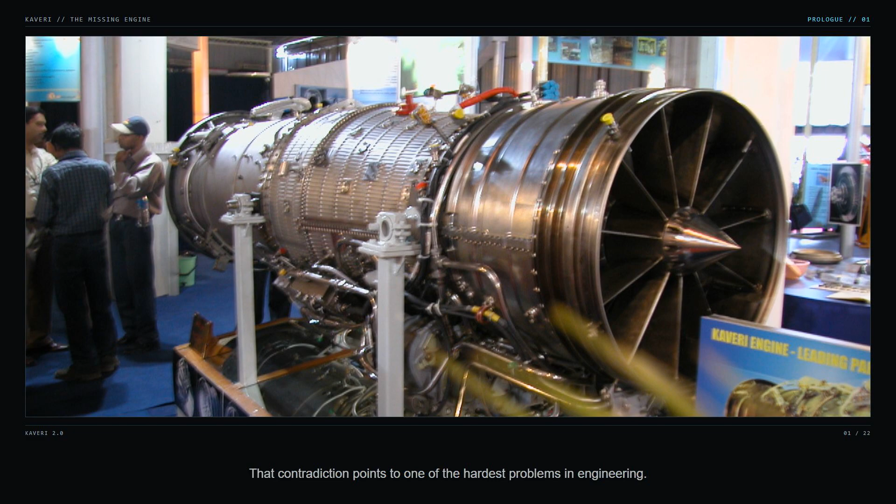India can design a supersonic fighter, build its airframe, write its flight control software, and integrate its weapons. But the Tejas still flies with an imported engine. That contradiction points to one of the hardest problems in engineering. A fighter turbofan must make enormous thrust from a compact machine, remain stable through violent throttle changes, survive temperatures that can weaken its own metal, and do all of this thousands of times.

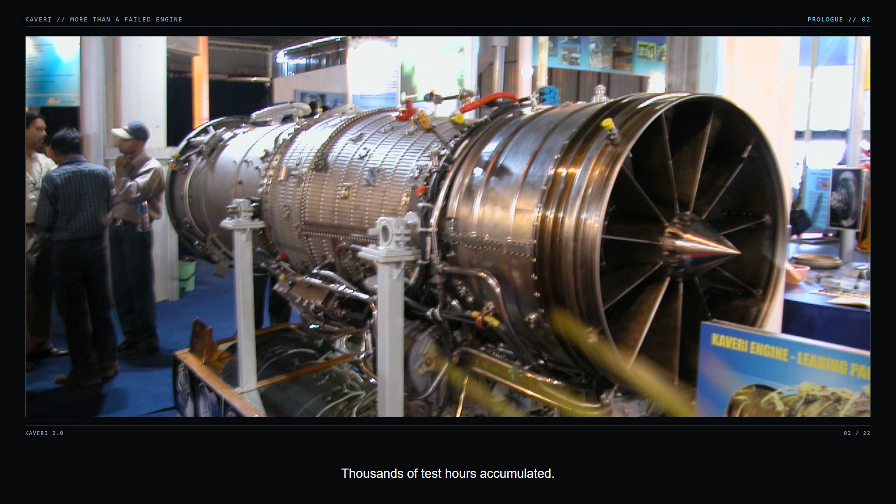Kaveri was India's attempt to master that complete system. The original Kaveri did not become the engine of the Tejas. That fact matters, but calling it simply a failed engine hides the engineering record. Nine full prototypes and four core engines were built. Thousands of test hours accumulated. A Kaveri flew on an IL-76 test bed. Materials, controls, rigs, certification methods, and manufacturing knowledge were created around it.

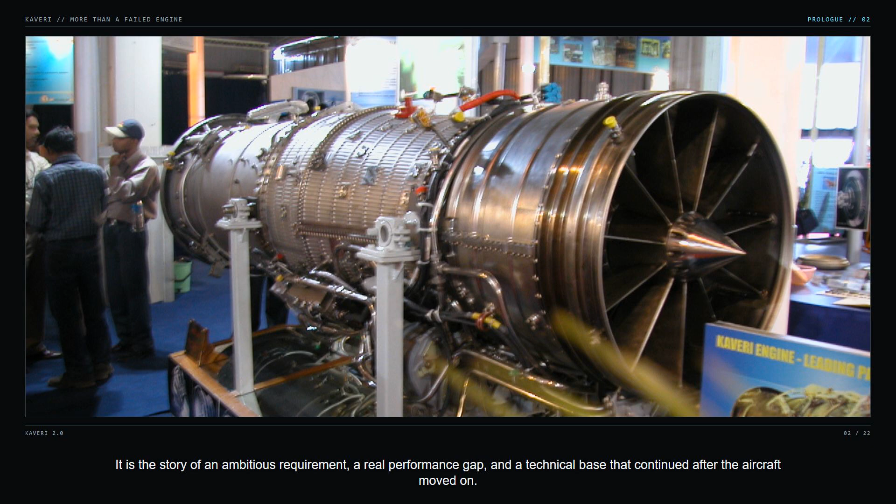The honest story is neither triumph nor humiliation. It is the story of an ambitious requirement, a real performance gap, and a technical base that continued after the aircraft moved on. The Kaveri project was sanctioned in 1989, when the light combat aircraft was still taking shape.

The goal was not merely to assemble a foreign design. GTRE was expected to develop an indigenous afterburning turbofan within the mass and dimensions available inside a light fighter. That meant solving aerodynamics, combustion, high-temperature materials, bearings, lubrication, controls, testing, and production at the same time. Every module affected the others. A heavier turbine demanded more structure. A weaker compressor reduced pressure and thrust. A hotter cycle demanded better blades and better cooling.

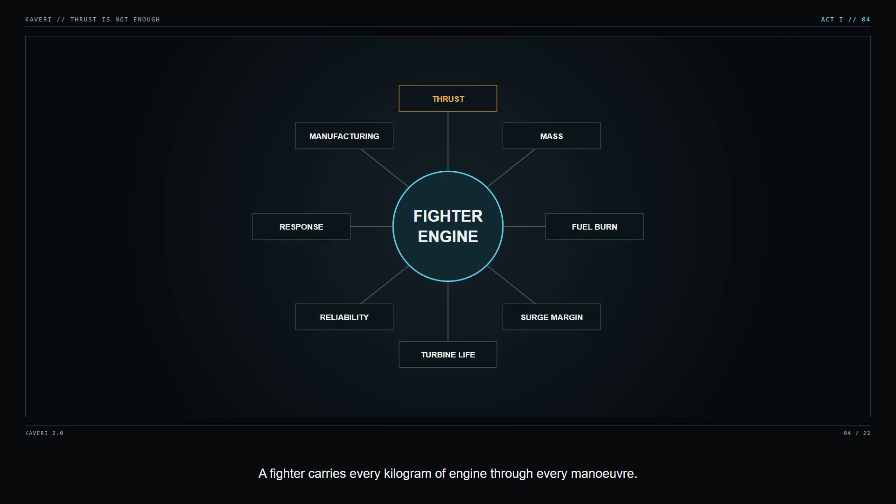An engine cannot be judged by thrust alone. A fighter carries every kilogram of engine through every maneuver. The inlet supplies a limited mass flow. The fuselage fixes the diameter. Fuel consumption controls range. The center of gravity constrains installation. Reliability governs whether the aircraft can be dispatched at all.

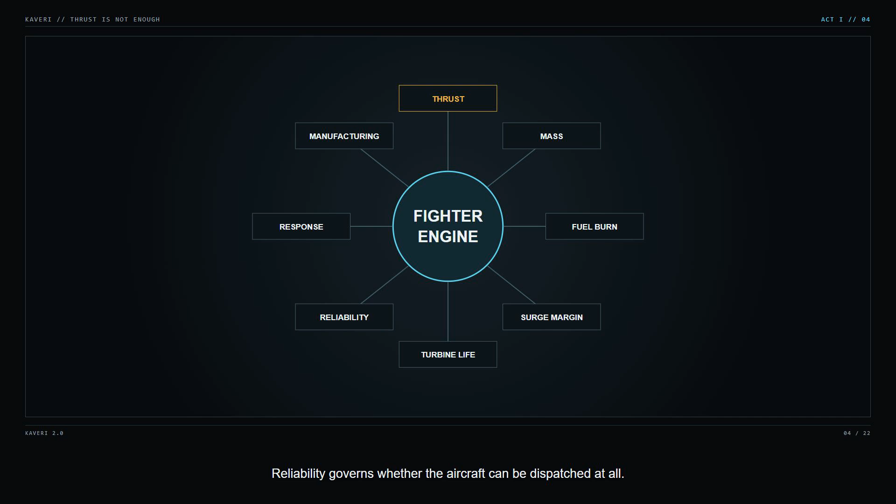The real target is a network: thrust, weight, fuel burn, response, temperature margin, life, and manufacturability. Kaveri had to meet those demands together. Making thrust, once on a stand, was only the beginning.

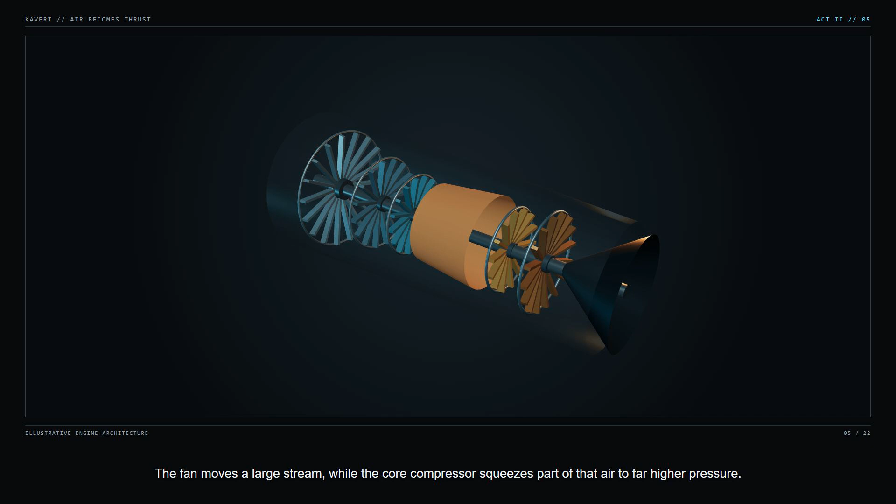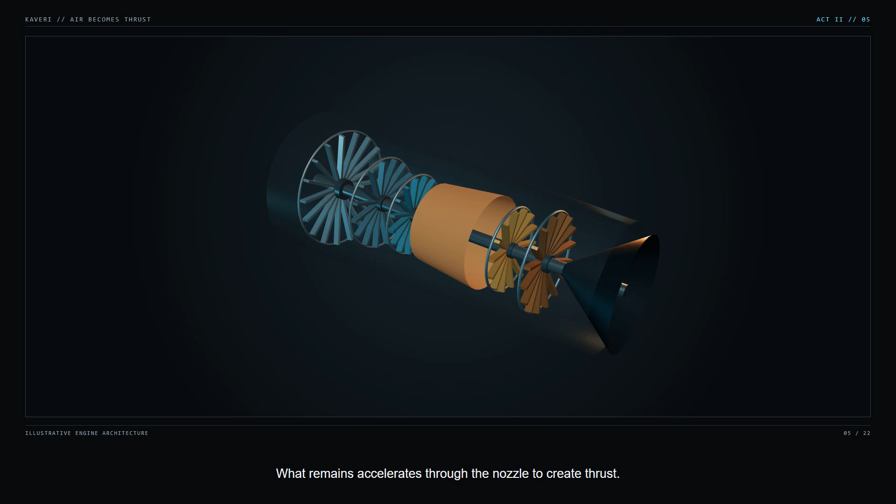A turbofan is a continuous energy conversion machine. Air enters the intake. The fan moves a large stream, while the core compressor squeezes part of that air to far higher pressure. Fuel burns in the combustor. The hot gas expands through turbine stages, which extract enough power to drive the compressor and fan through concentric shafts. What remains accelerates through the nozzle to create thrust. In an afterburning fighter engine, more fuel can be burned downstream of the turbine for a temporary increase in exhaust energy.

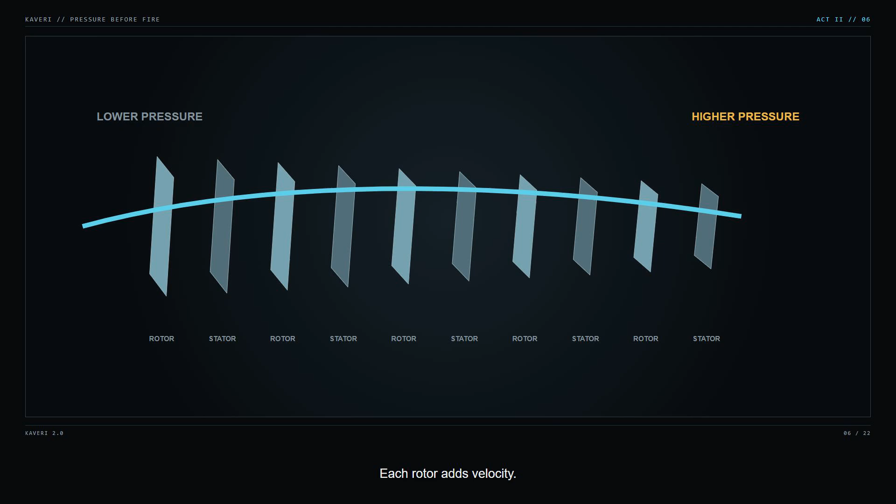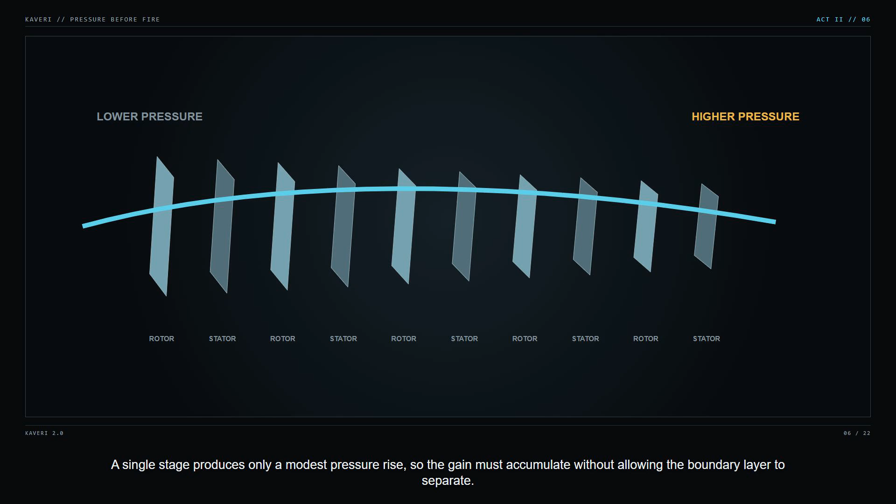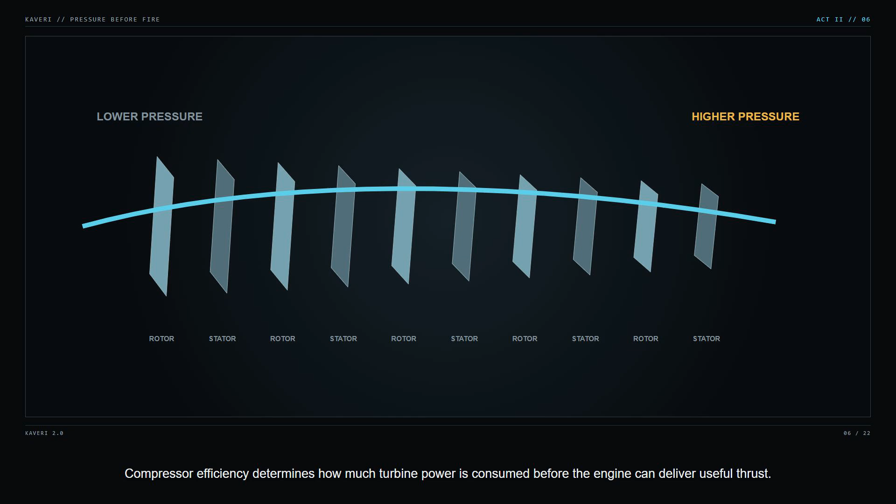The compressor is a ladder of rotating and stationary airfoils. Each rotor adds velocity. Each stator turns part of that velocity into pressure and redirects the flow for the next stage. A single stage produces only a modest pressure rise, so the gain must accumulate without allowing the boundary layer to separate. Clearances measured around blade tips, surface finish, vibration, and manufacturing variation all change the result. Compressor efficiency determines how much turbine power is consumed before the engine can deliver useful thrust.

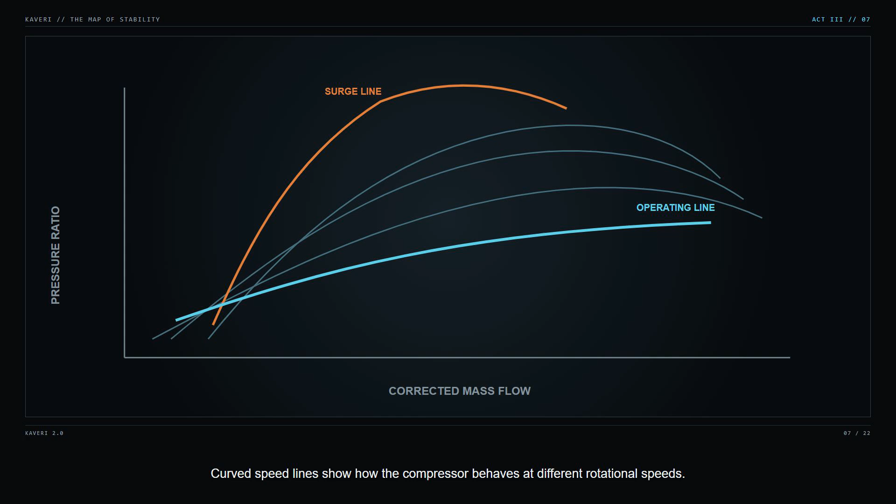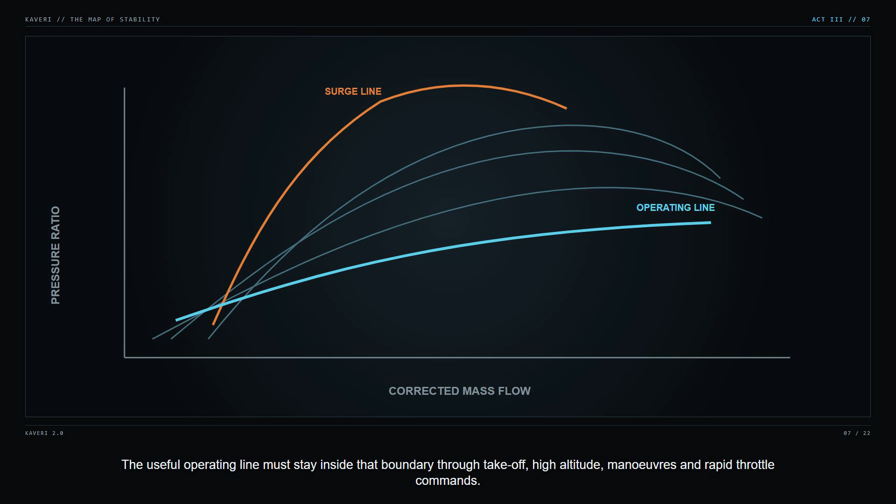Engineers plot compressor behavior on a map. Corrected mass flow runs across one axis. Pressure ratio rises on the other. Curved speed lines show how the compressor behaves at different rotational speeds. Near one edge is choke, where more flow becomes difficult. Near the other is the surge line, where stable compression can collapse. The useful operating line must stay inside that boundary through takeoff, high altitude, maneuvers, and rapid throttle commands. A fighter needs margin not only at steady conditions, but while the entire engine is changing speed.

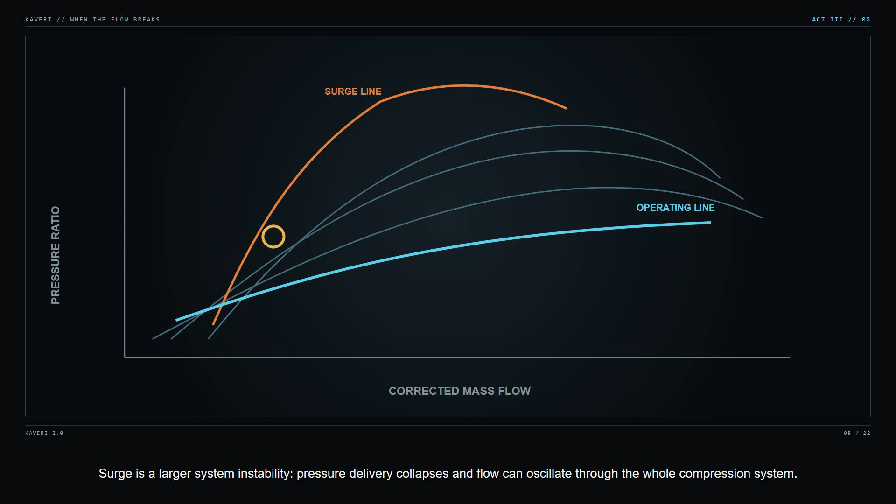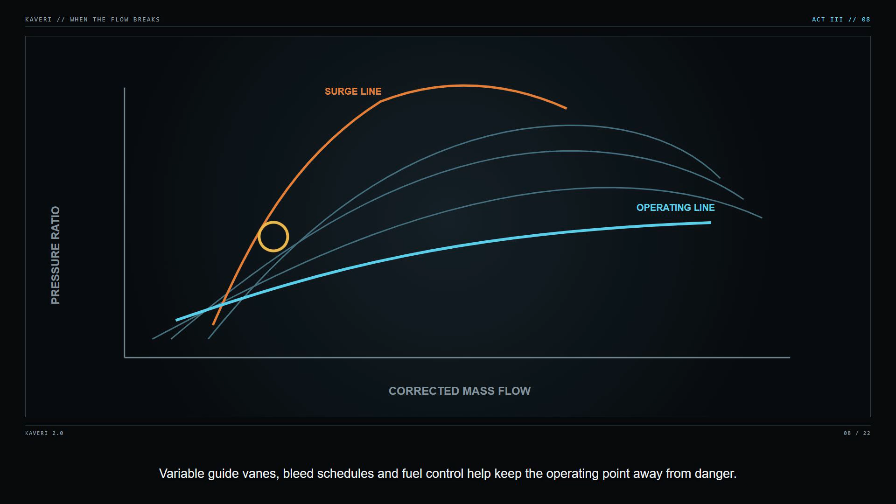Rotating stall begins when regions of separated flow travel around the compressor annulus. Surge is a larger system instability. Pressure delivery collapses and flow can oscillate through the whole compression system. The result may be a bang, loss of thrust, extreme vibration, or flame disturbance. Variable guide vanes, bleed schedules, and fuel control help keep the operating point away from danger. But each protection costs complexity or performance. The compressor must be efficient near its design point, and still tolerant everywhere the aircraft may demand power.

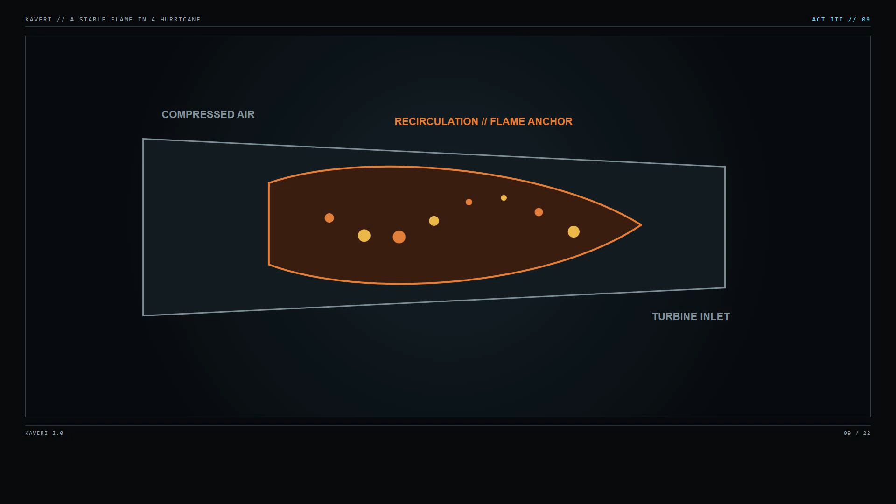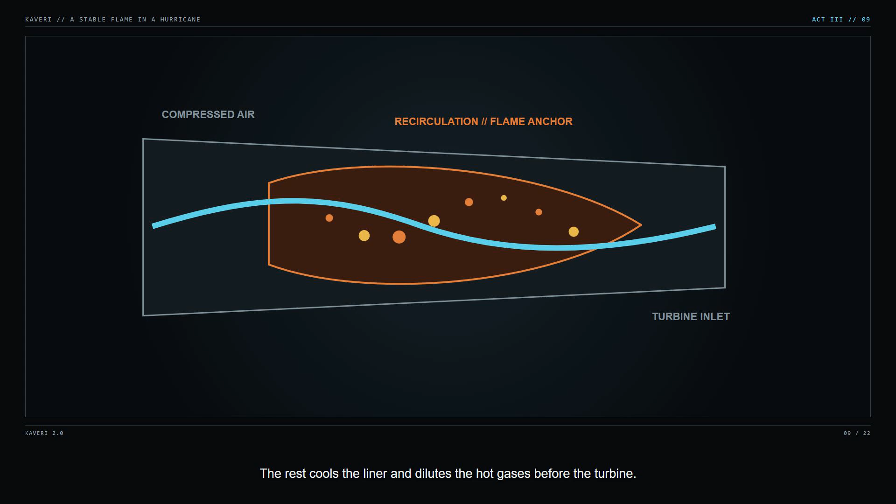Compressed air reaches the combustor moving far too quickly for a flame to survive without careful management. Swirlers create recirculation zones that anchor combustion. Only part of the air enters the primary burning region. The rest cools the liner and dilutes the hot gases before the turbine. Engineers must avoid flameout, pressure oscillation, smoke, and uneven temperature. That last quantity, called pattern factor, is crucial. A local hot streak entering the turbine can shorten blade life, even when the average temperature looks acceptable.

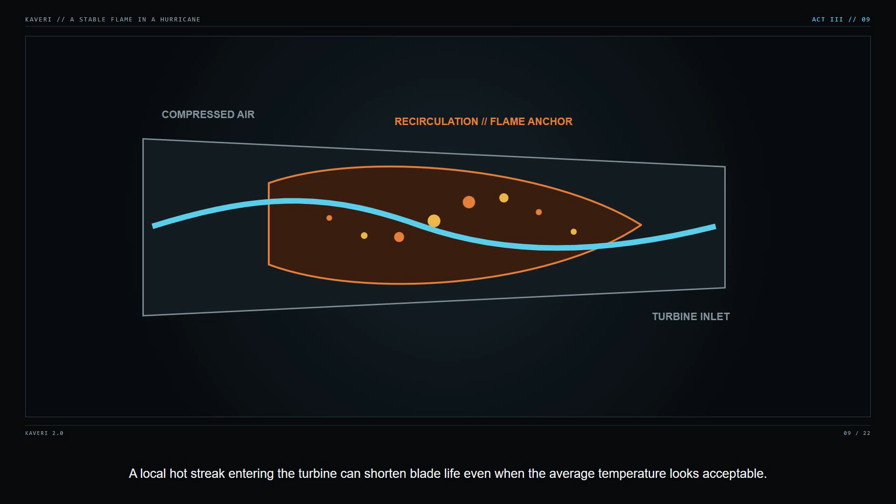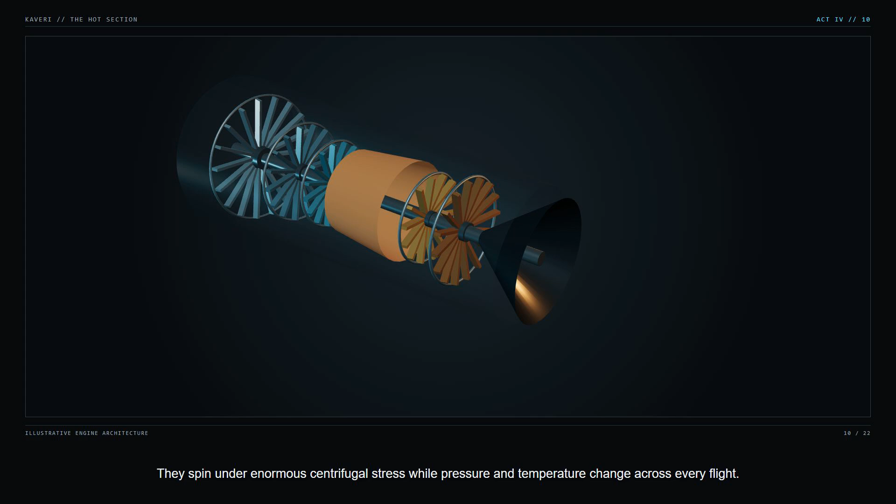The core of the difficulty sits behind the combustor. Turbine blades must extract work from gas hot enough to damage the material carrying the load. They spin under enormous centrifugal stress, while pressure and temperature change across every flight. The Kabini core brought together Kaveri's high-pressure compressor, combustor, and high-pressure turbine, so that this hot-end system could be studied as one machine. Performance here is not a single material number. It is an interaction between alloy, crystal structure, coating, cooling geometry, stress, and manufacturing quality.

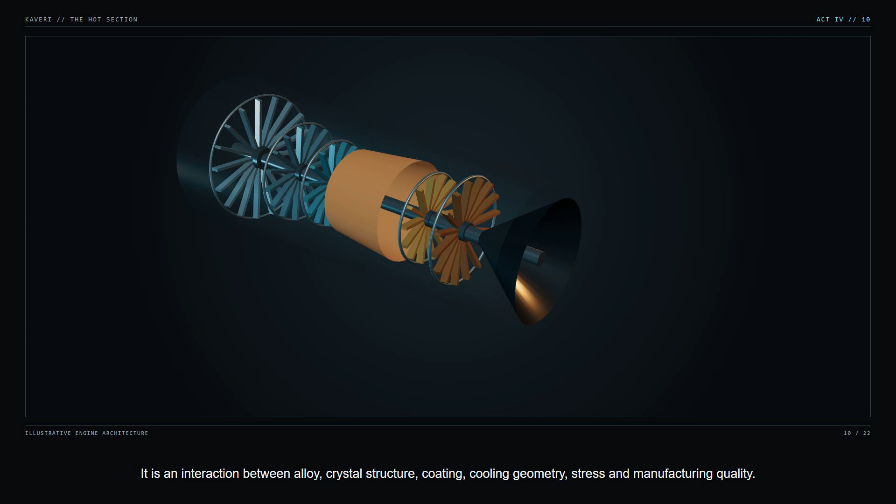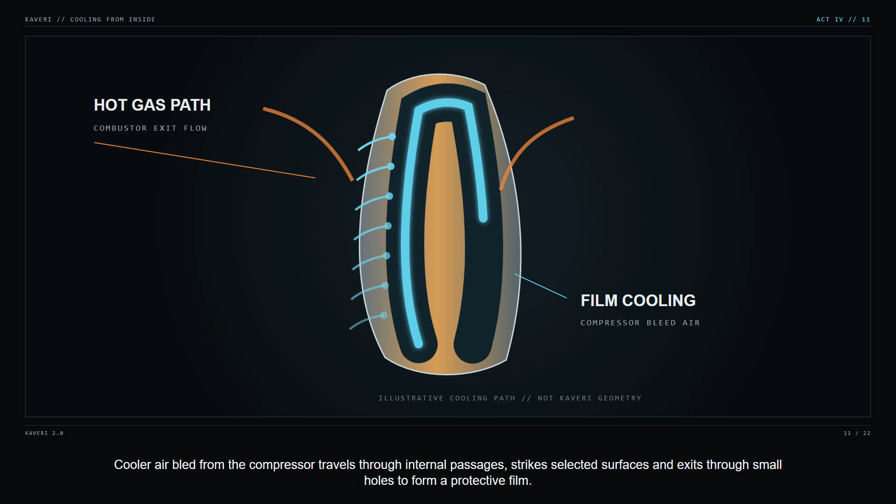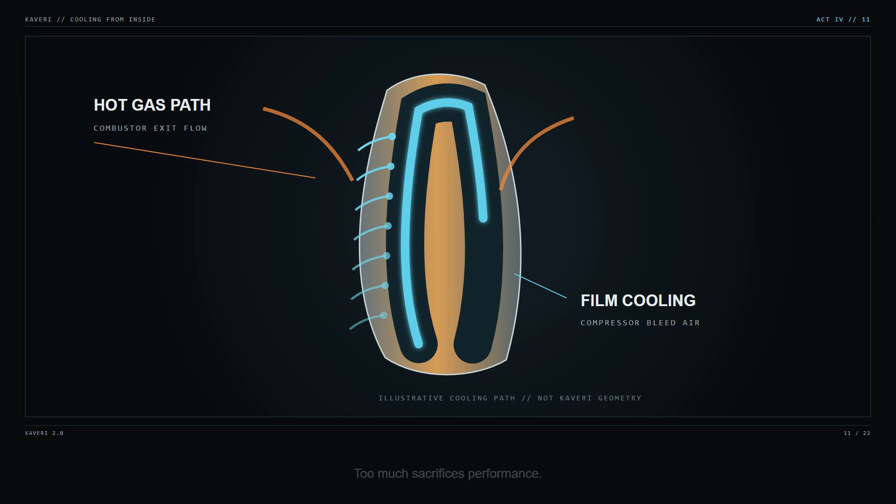A modern turbine blade is often hollow. Cooler air bled from the compressor travels through internal passages, strikes selected surfaces, and exits through small holes to form a protective film. Thermal barrier coatings slow heat entering the metal, but cooling air is not free. Air diverted from the main cycle reduces efficiency, and every hole changes stress and manufacturing difficulty. Too little cooling sacrifices life. Too much sacrifices performance. The design problem is to place limited cooling flow exactly where the blade needs it, repeatedly, across thousands of manufactured parts.

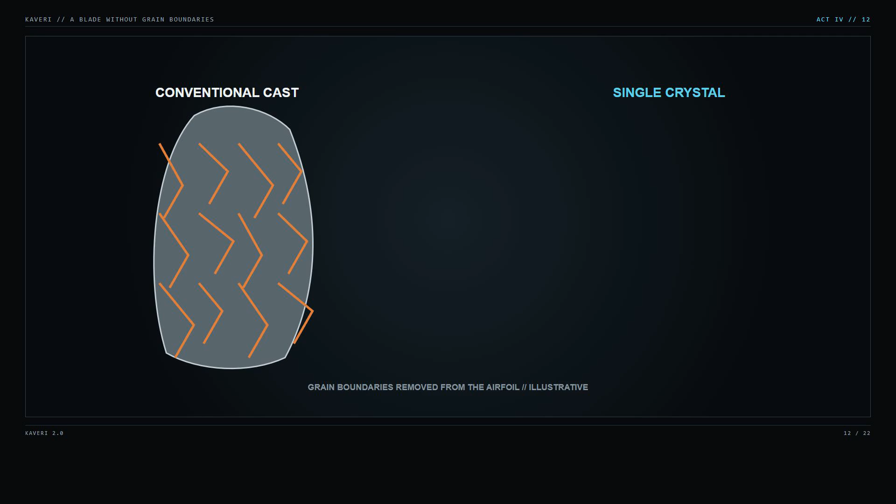Ordinary cast metal contains many crystals separated by grain boundaries.

At high temperature and stress, grain boundaries can become paths for creep and damage. Directionally solidified blades align grains with the major load. Single crystal blades go further by eliminating grain boundaries from the airfoil, but the phrase single crystal can sound more magical than it is.

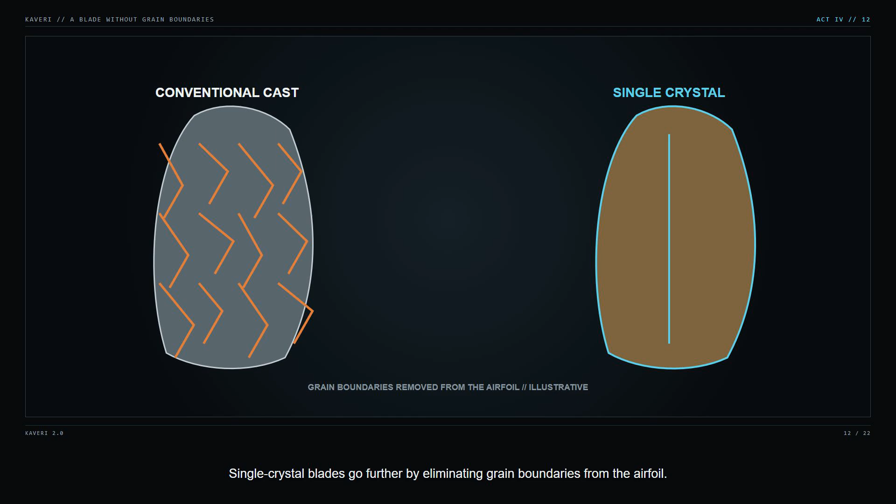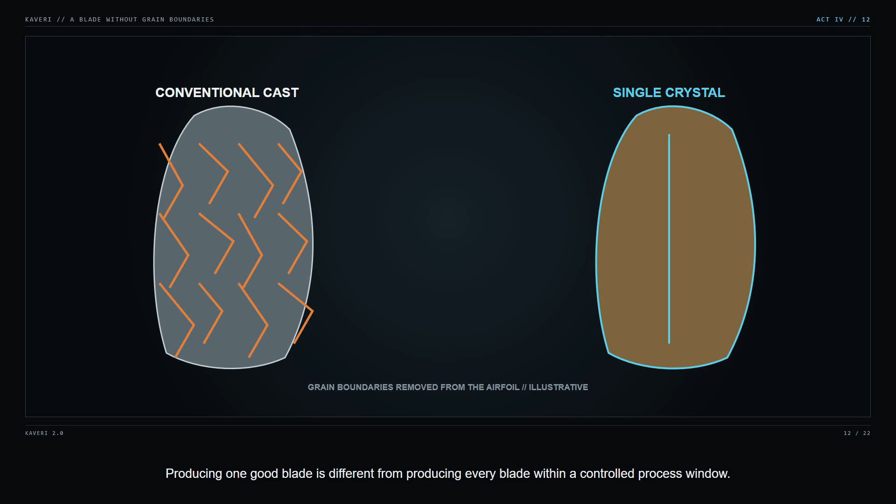The alloy chemistry, casting process, defects, heat treatment, coating, cooling passages, and inspection must all work together. Producing one good blade is different from producing every blade within a controlled process window.

The Tejas decision came down to integration reality. In the configuration examined by the Controller and Auditor General, Kaveri weighed about 135 kilograms more than the cited target and produced 70 kilonewtons against an 81 kilonewton requirement.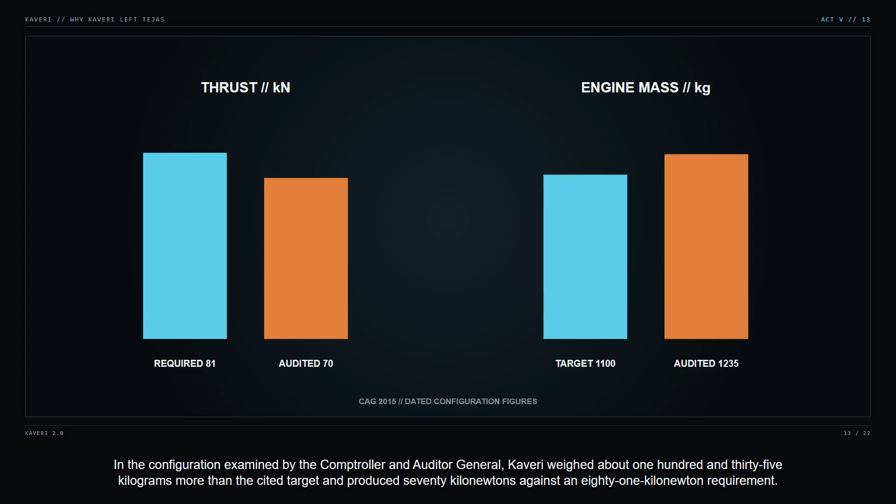Those are dated audit figures, not a claim about every later test article, but they show the coupled problem clearly: less thrust from more mass.

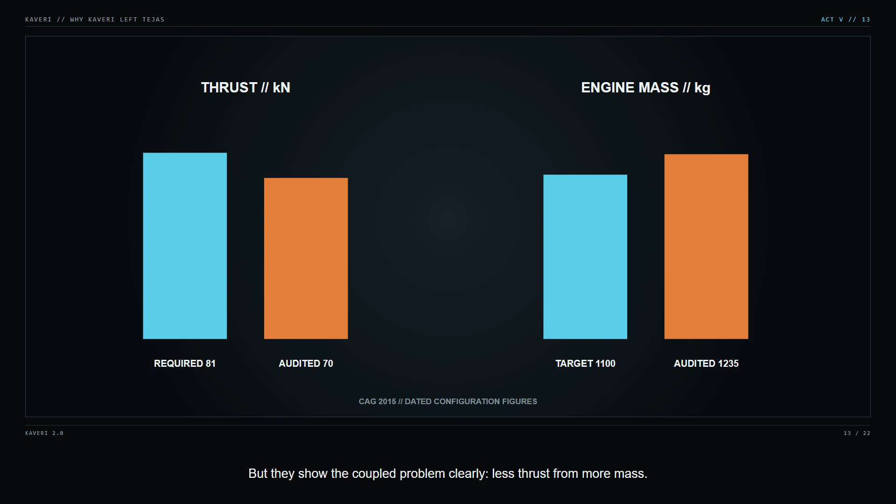The aircraft program could not wait indefinitely for compressor, turbine, control, and reliability work to converge, so Tejas continued with an imported engine. By 2021, official figures listed 3,217 hours of Kaveri engine testing, along with completed altitude and flying testbed trials.

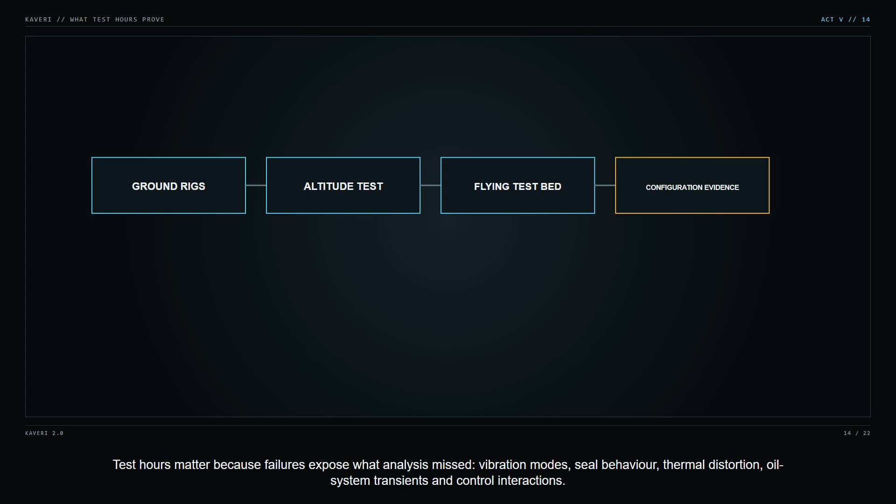Test hours matter because failures expose what analysis missed: vibration modes, seal behavior, thermal distortion, system transients, and control interactions. But a test campaign does not automatically equal an operational engine.

Certification requires a defined configuration, repeatable hardware, demonstrated life, and evidence tied to an aircraft duty cycle. Kaveri built significant test experience while still falling short of the fighter installation it began with.

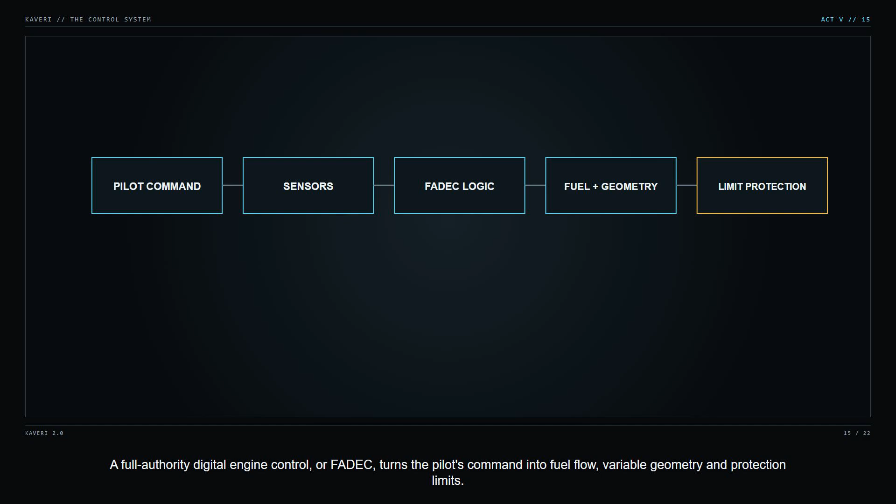Full Authority Digital Engine Control, or FADEC, turns the pilot's command into fuel flow, variable geometry, and protection limits. It watches shaft speed, temperature, pressure, and actuator position. It must accelerate the engine quickly without crossing surge or temperature limits, and it must respond safely when a sensor disagrees.

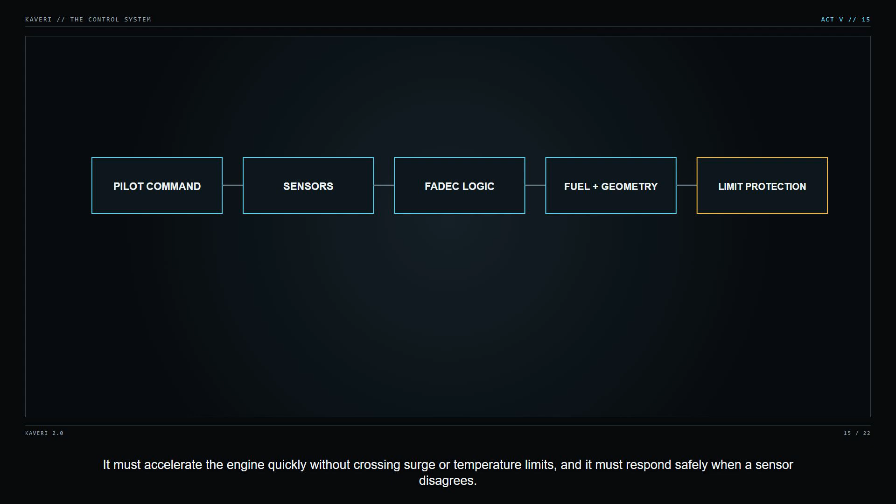India reported designing, developing, and qualifying an indigenous FADEC through the Kaveri program. That is a meaningful capability.

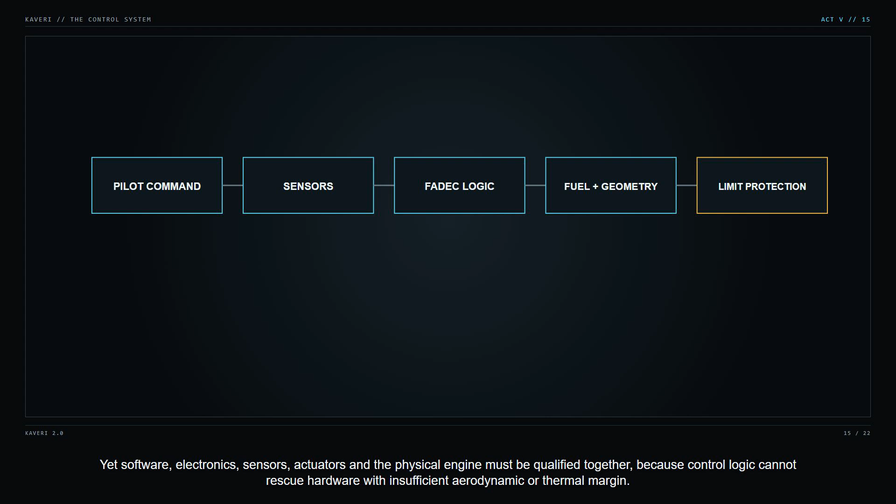Yet software, electronics, sensors, actuators, and the physical engine must be qualified together, because control logic cannot rescue hardware with insufficient aerodynamic or thermal margin.

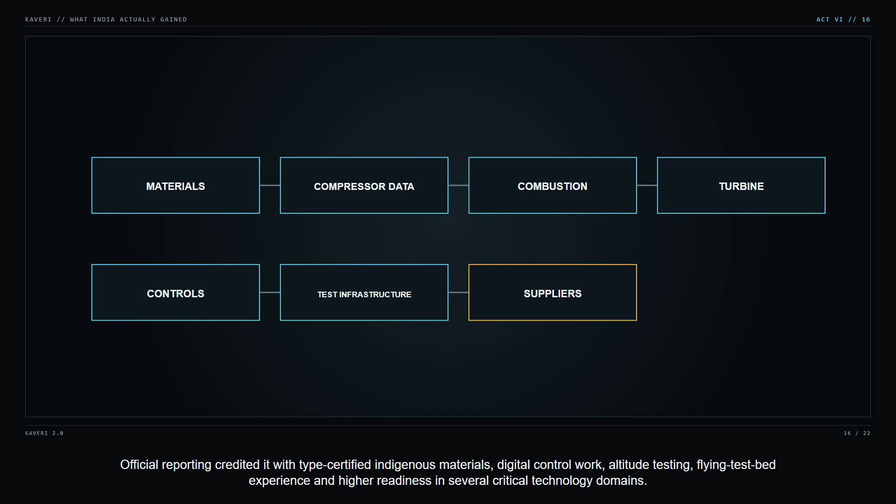The program created more than complete engines. Official reporting credited it with type-certified indigenous materials, digital control work, altitude testing, flying testbed experience, and higher readiness in several critical technology domains.

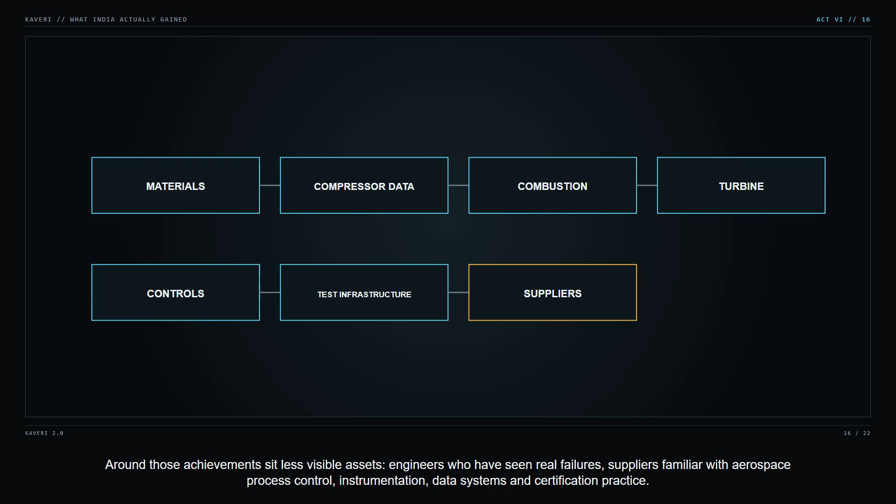Around those achievements sit less visible assets: engineers who have seen real failures, suppliers familiar with aerospace process control, instrumentation, data systems, and certification practice. None of this erases the Tejas shortfall. It explains why the program's value cannot be measured only by whether one engine entered one aircraft.

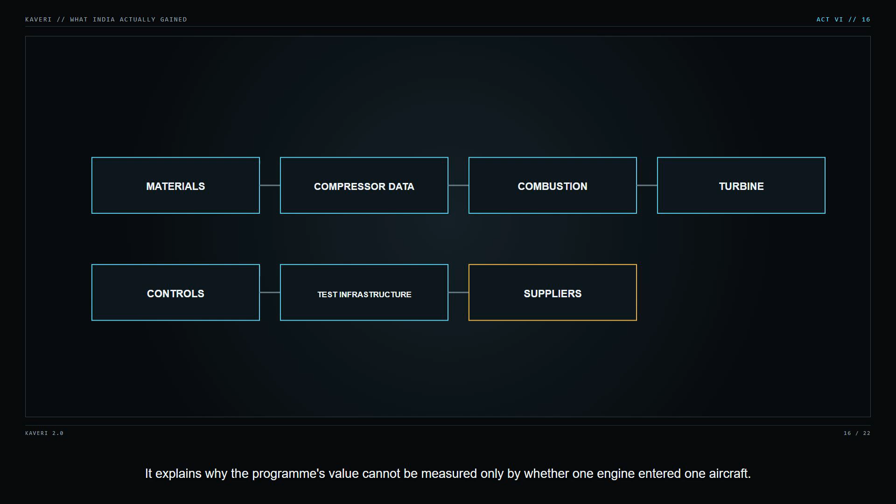Complex capability accumulates through hardware, people, facilities, and data. The dry Kaveri derivative removes the afterburning requirement and aims at a different aircraft mission.

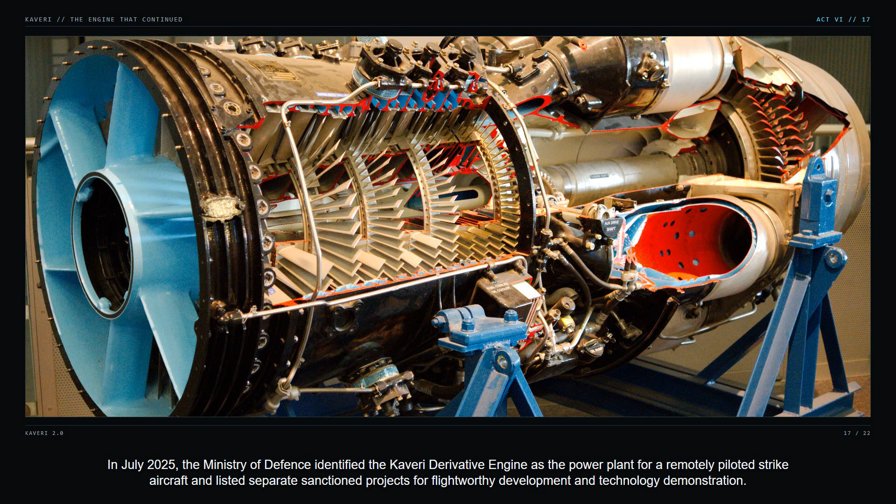In July 2025, the Ministry of Defence identified the Kaveri derivative engine as the power plant for a remotely piloted strike aircraft and listed separate sanctioned projects for flightworthy development and technology demonstration. That does not make the derivative a fighter engine, and it should not be presented as one.

It means a core developed for Kaveri can be adapted where non-afterburning thrust, endurance, and installation requirements create a different engineering trade space.

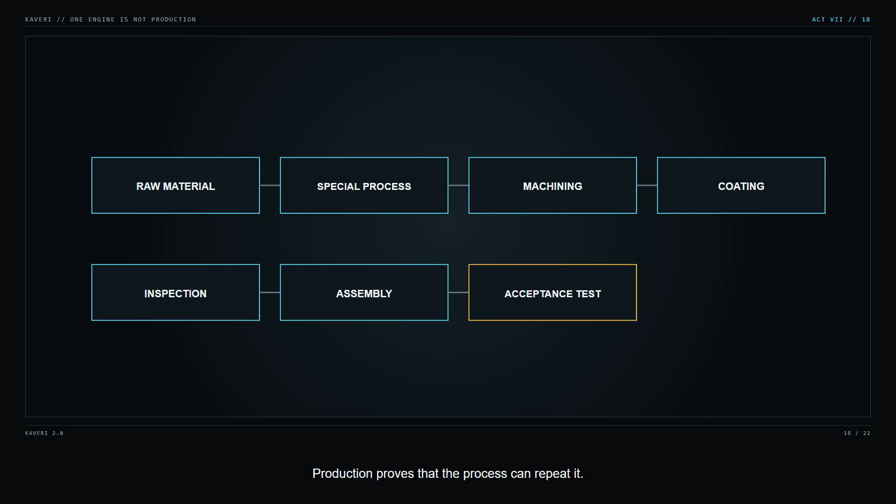A prototype proves that a design can exist. Production proves that the process can repeat it. Powder chemistry, forging history, casting defects, machining, coatings, hole geometry, balancing, and inspection all create variation. A fighter engine must tolerate that variation without losing thrust, life, or stability.

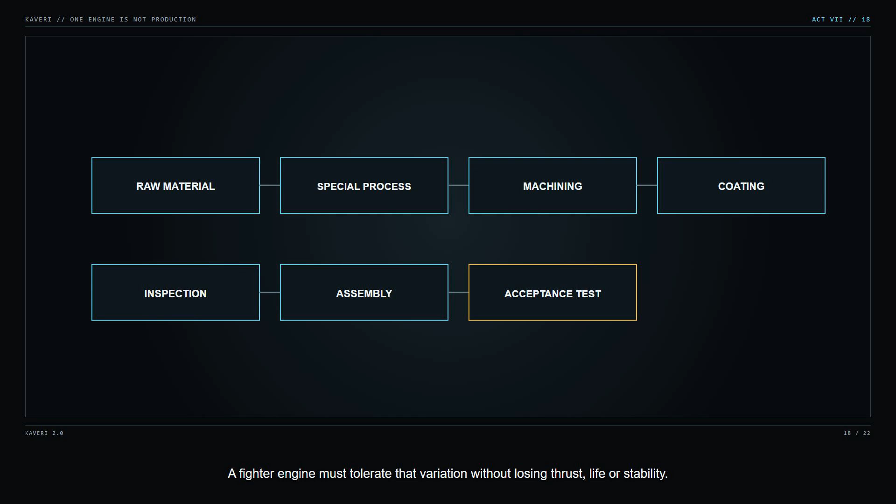The factory therefore becomes part of the design. Drawings need measurable limits. Suppliers need controlled special processes. Every nonconformance needs a disposition backed by engineering evidence.

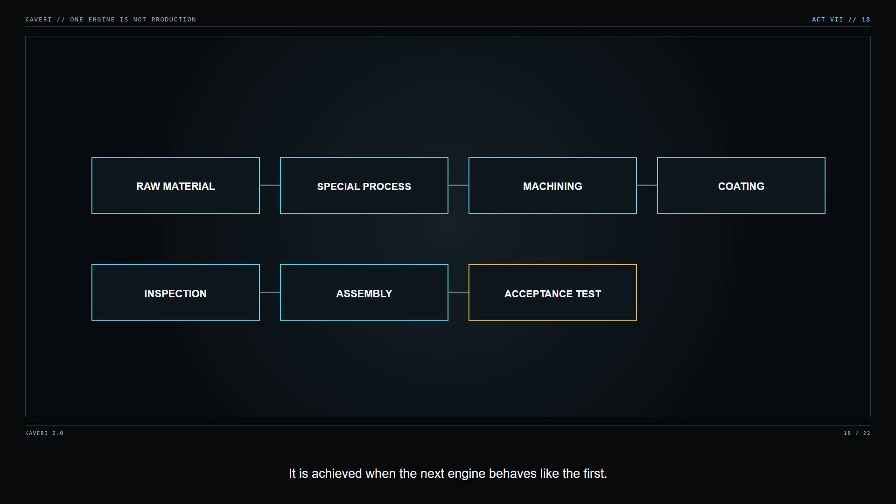Sovereignty is not achieved when one engine runs. It is achieved when the next engine behaves like the first.

Kaveri 2 is useful as a documentary title, but it should not be mistaken for the official name of one cleanly defined program. A genuine next-generation core would need higher compressor efficiency and pressure ratio, stronger surge margin, more uniform combustion, higher temperature capability, better cooling, modern control electronics, and production repeatability.

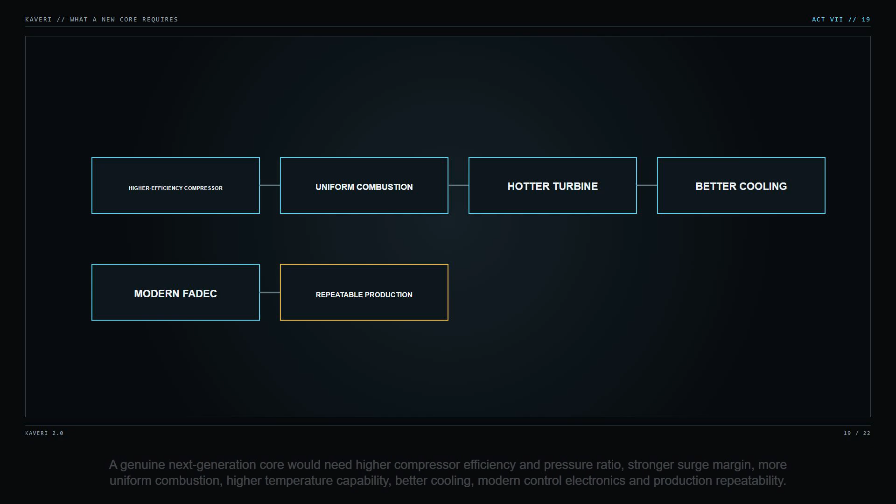These advances must arrive together in a lighter engine with greater life and thrust-to-weight ratio.

Replacing a module may improve one limit. Building a competitive fighter core requires the entire thermodynamic and industrial system to converge.

Three ideas must remain separate. First is the Kaveri technology base: knowledge, rigs, materials, controls, and test experience. Second is the Kaveri derivative, adapted for a non-afterburning unmanned aircraft role.

Third are future high-thrust fighter engine programs, which may use capabilities born in Kaveri but would require a new level of core performance and industrial execution.

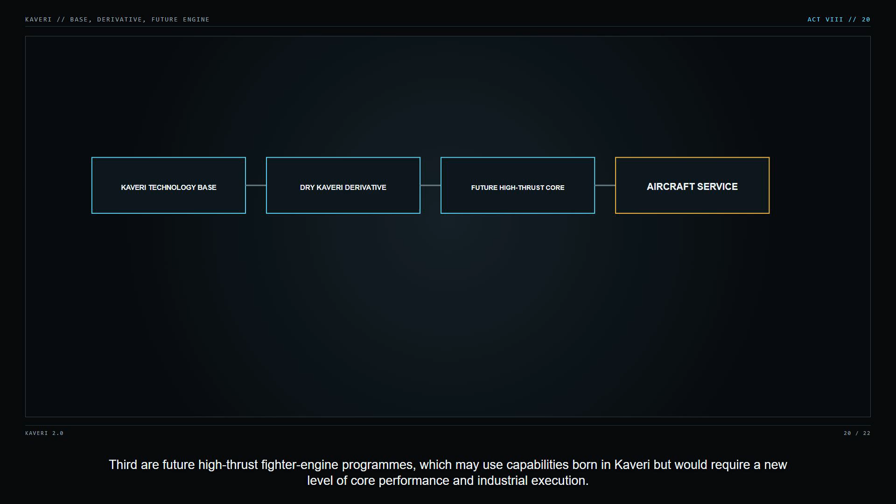International collaboration may accelerate that climb. It does not remove the need for Indian engineers to own requirements, design decisions, validation data, manufacturing processes, and configuration control. Fighter engines are difficult because every advantage creates another penalty.

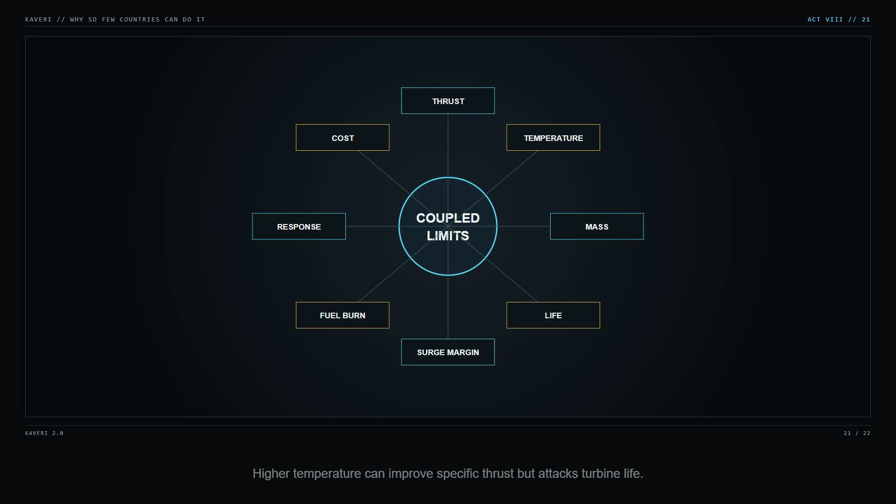Higher temperature can improve specific thrust but attacks turbine life. More cooling protects blades but steals compressed air. More stages can raise pressure but add weight, length, and modes of vibration.

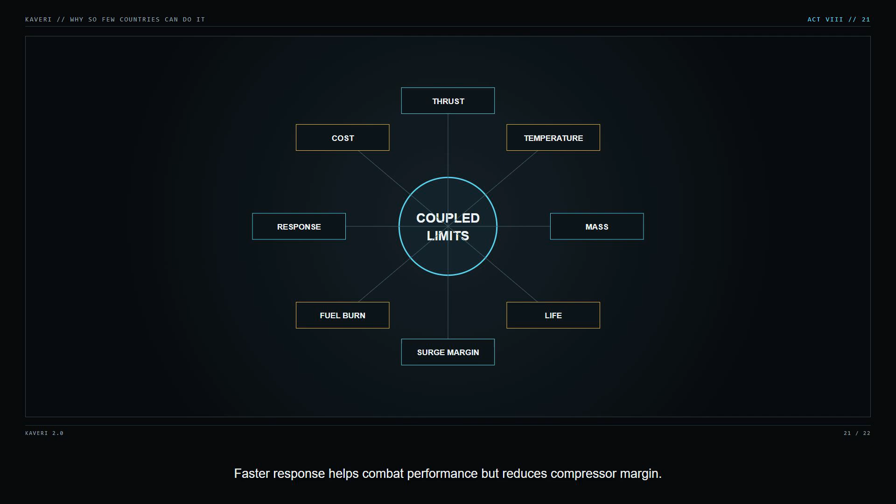Tighter clearances improve efficiency but risk rubbing during thermal distortion. Faster response helps combat performance but reduces compressor margin. The machine operates near aerodynamic, thermal, structural, and manufacturing limits at once.

Mastery is not a secret component. It is the ability to manage thousands of coupled compromises through design, test, and production.

The original Kaveri did not deliver the Tejas engine that India set out to build. It also did not disappear. Its cores, tests, controls, materials, and failures became part of India's propulsion base, and its dry derivative now follows a different path.

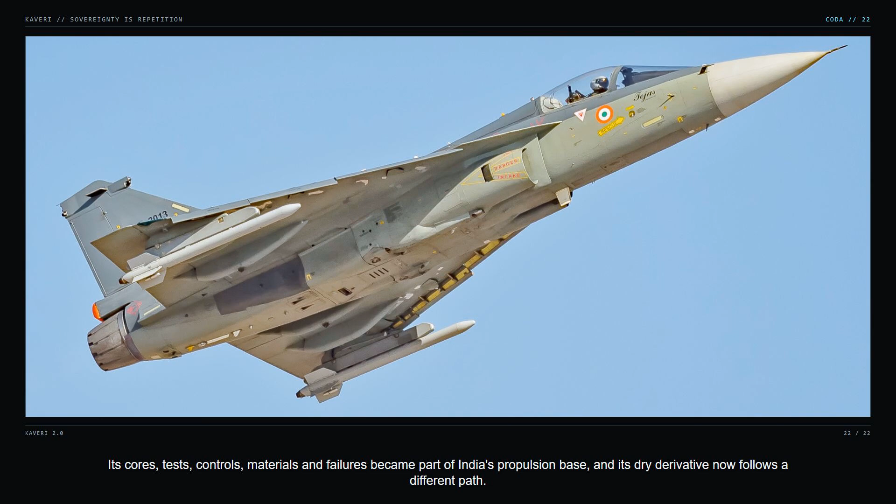The next fighter engine will be judged by a harder standard than a prototype or announcement. It must produce the required thrust at the required mass, survive its duty cycle, remain stable in the aircraft, and be manufactured repeatedly. Jet engine sovereignty is not a moment. It is a system that works again and again.